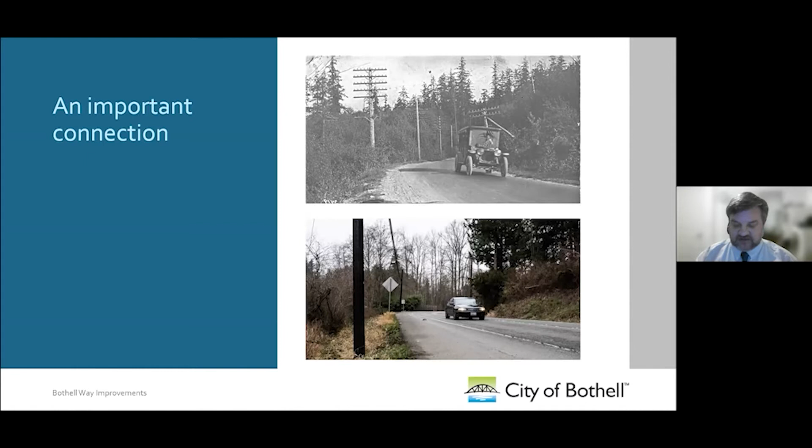The project will improve Bothell Way between Reder Way, just north of downtown Bothell, and 240th Street Southeast to the north. The City of Bothell has made downtown safer for shoppers and residents by adding sidewalks, signage, and bike lanes. We hope to do the same for the residents and businesses of this section of Bothell Way too. And now I'm going to hand this off to our consultant project manager, Ross French, to update you on the current situation.

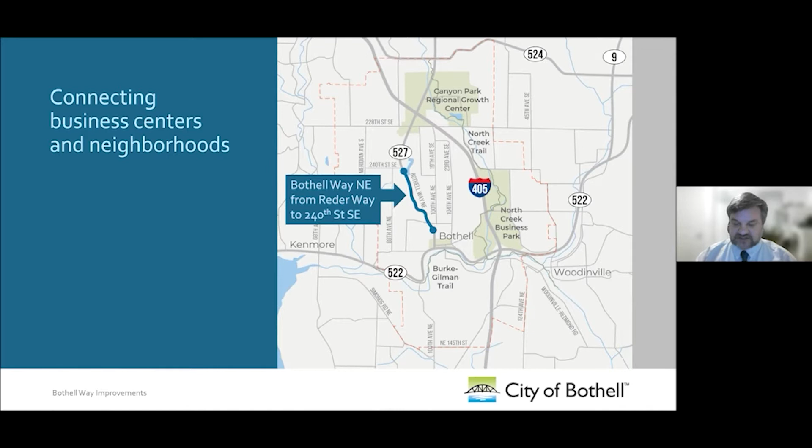Sorry about that. Just to give a little background, I'm Ross French, project manager from WSP. In 2018, there were 14,900 daily car trips along this section of Bothell Way, and that number is projected to grow to 21,000 in 2035, or a 40% increase.

In addition, the combined campus enrollment of University of Washington Bothell and Cascadia College in the area has over 10,000 students. UW Bothell is the 4th fastest growing 4-year college in the nation. It expects to increase its enrollment by 40%. This means 14,000 students and thousands of faculty and staff that are making regular trips to and from the campus. The road is often congested and is not meeting current service standards.

Canyon Park jobs are expected to grow 40% in the next 20 years as well, and the number of households in the area will likely double. Downtown Bothell is expected to add thousands more households in coming decades too.

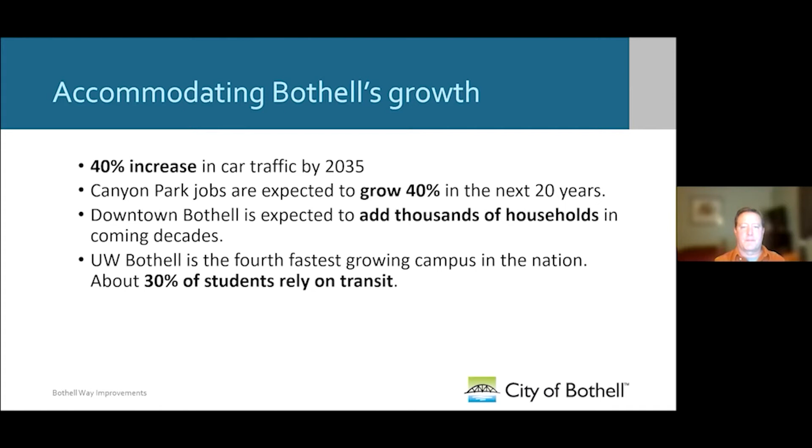This section of Bothell Way is a missing link. It's a missing link for people walking, running, or rolling between downtown Bothell and shopping and neighborhoods to the north. When Bothell Way was built, there were few homes along this stretch. Now there are hundreds of households, with more going in. There are plenty of services along Bothell Way, from restaurants to grocery stores, but there's no safe way to walk to and from these businesses.

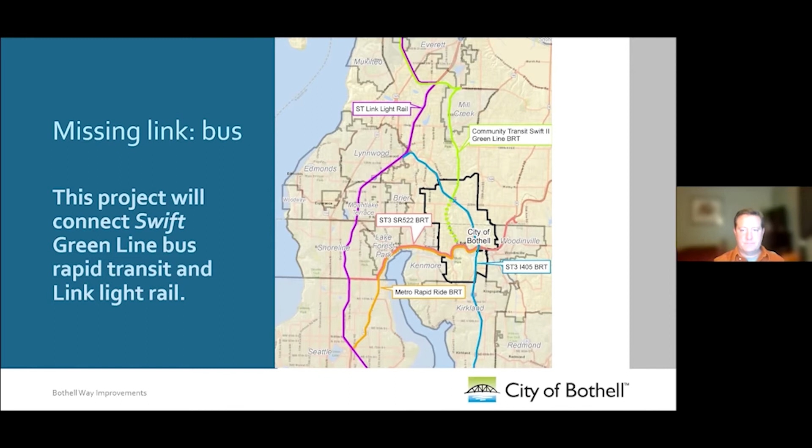The number of businesses along this stretch has grown in recent years, and our plans for the project will make it easier for customers to access them. The project will add a center turn lane, making it easier for cars turning into businesses to do so safely. Added sidewalks and bike lanes will make it safer for all shoppers, regardless of how they get from their homes to area businesses.

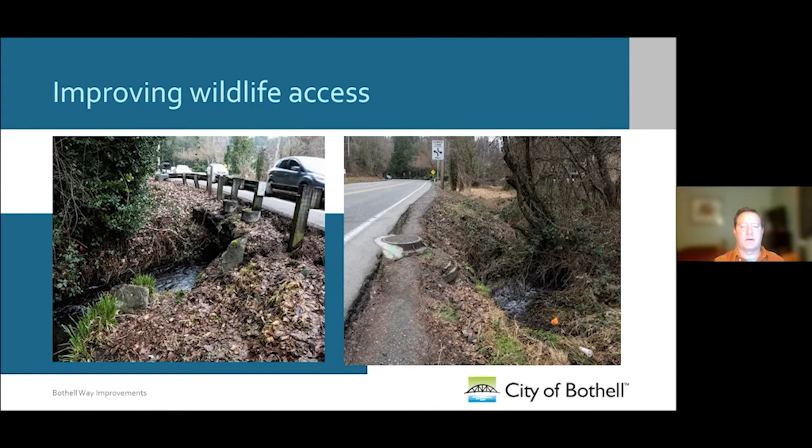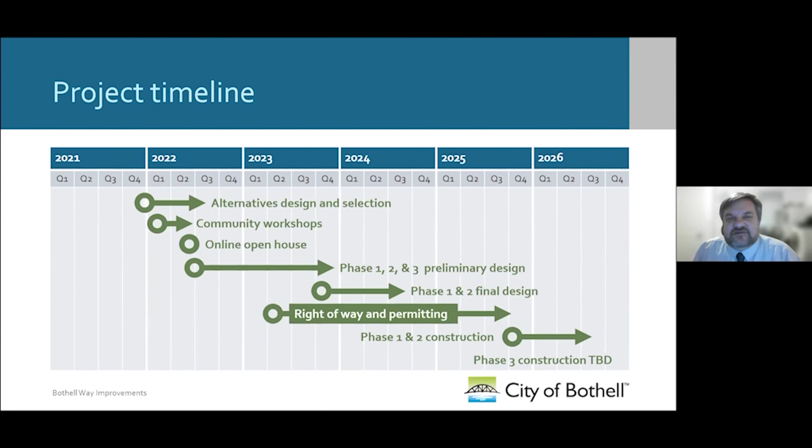There will, in phase 3, be a length of section that does not need a center turn lane, and we will not be providing one there. That's the middle section, the more rural section. It all depends on what access there is now and what access we see being developed in the future. If there is access needed, there will be a center lane provided, but there is a good chunk of phase 3 that does not apply, so there will not be.

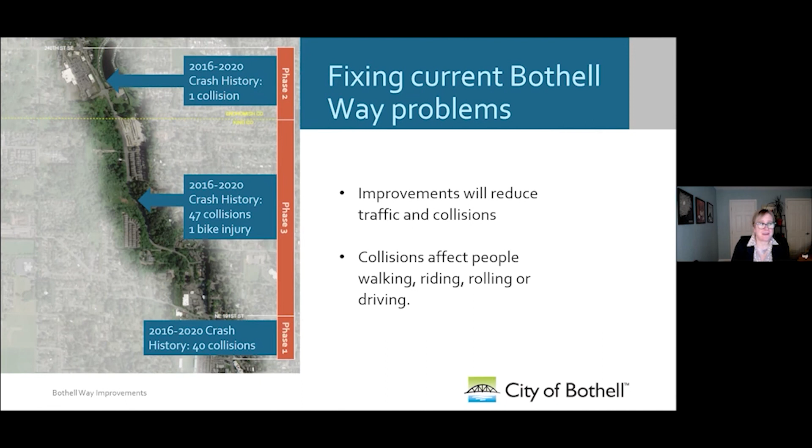Thanks, Jack. And Alan noted he's disappointed in the phasing. Sounds like people are really looking forward to sidewalks and getting the safety measures, so glad to hear that. But yes, thank you so much. I think that's it for our questions now.